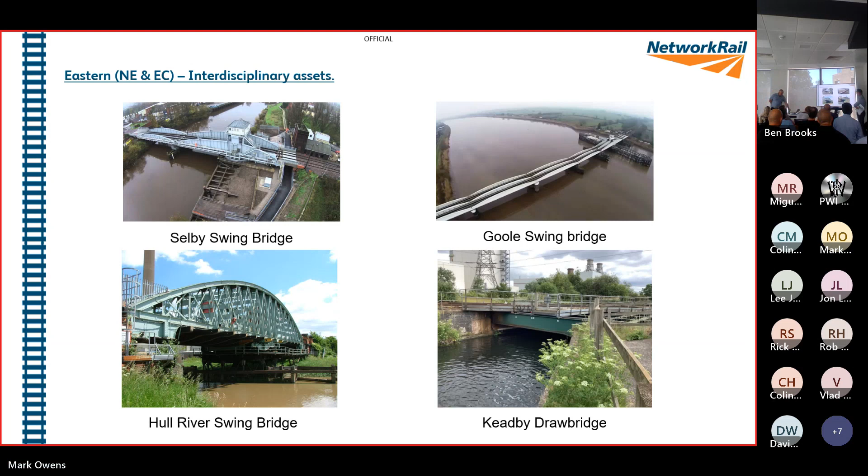Just a bit of background, and you can see the diagram there. When we look at Keadby Bridge, there are three bearing beams, and we've got some funny names for them: Gertrude, Madge, and Ethel. The one we're going to concentrate on tonight is Gertrude.

So just a bit of background. Keadby is located between Doncaster and Scunthorpe. Most people will have had some interaction with Keadby Bridge in their careers, and I've no doubt there's a lot of people here that will have had at least some issues they've had to solve on Keadby. It's obviously a complex asset, and a multidisciplinary one as well.

For me, it's more about this: if anything fails, the bridge doesn't work. So it doesn't really matter whose fault it is, it doesn't really matter what the fault is—it's about trying to get everything back working as quickly as possible.

It started life as a swing bridge, constructed in 1860, and was converted to a drawbridge in 1925. Since then it's had, I think, three replacements of the deck, the latest being in 2003, and the last real intervention was in 2007 when the west abutment was renewed.

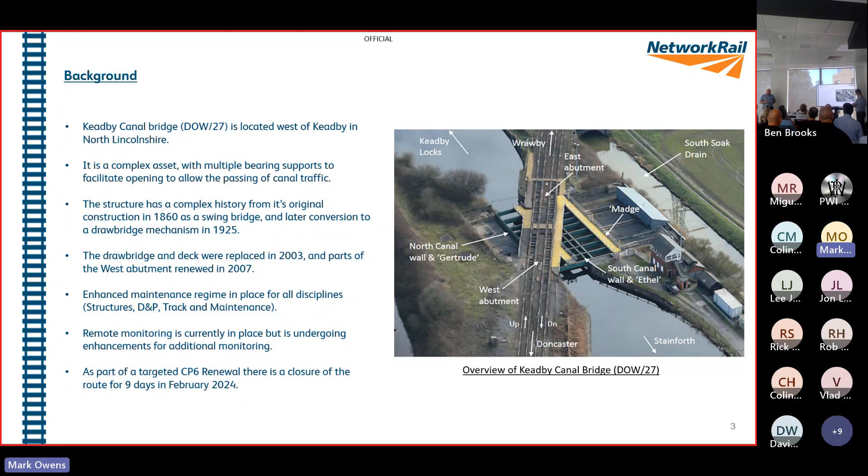So historically, lots of people in a room like this have been involved with Keadby professionally. I was not one of those people. So when I had the gift of Keadby come under my portfolio, I didn't really recognise how strategically important it was until it went into one of its periods of being temperamental. The route managing director was straight on to me saying, what's going on at Keadby? And I'm a bit like, it's Keadby, what's that?

It's a swing bridge, and it's a bit like it's all freight goes along there. You see from this map, Mark's already described geographically where it is, but it's really important for getting freight to and from Immingham docks, and more importantly, it serves Drax Power Station, so it's heavily linked with supplying electricity to that part of the region.

There's some really alarming stats about how much biomass Drax stores on site. When I looked at Drax back in the day, it was coal, and now it's biomass, which I think is better, but it burns faster. So it's something like they've got 3 days supply of biomass there, and once that's gone, people's lights start going out. The main arteries for that are through Keadby.

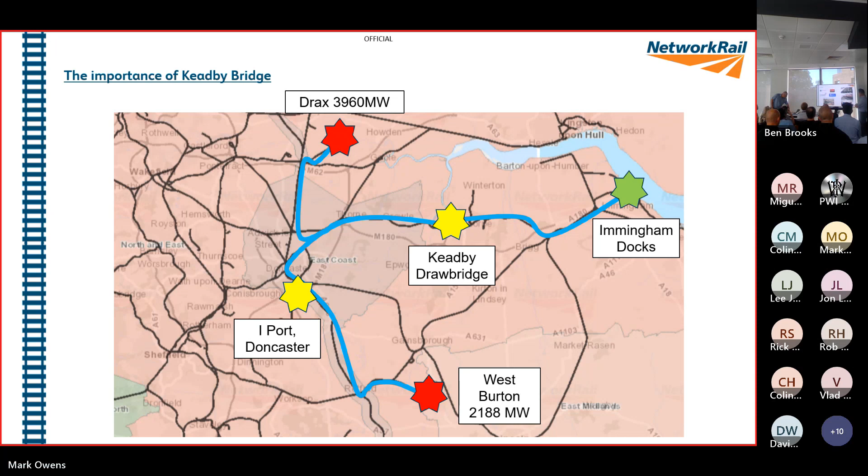These are the main customers, shall we say, the railway customers that use Keadby's. We've got passengers, Transpennine Express and Northern, and we've got freight. But the Canal and River Trust are really very important customers as well.

We've got a lot of pleasure craft that use the canal, and they do have a right to pass. So if we close that bridge for any period of time, we pay something in the order of £5,000 a day to the Rivers Trust.

So this is just really showing who interacts on that bridge. As I've said before, anything goes wrong, nothing works. So we've had to get really good at collaboration on this bridge. When I first came back in touch with this bridge as the IME, we were still a little bit of a standoff. I met with Simon, and we managed to start getting a lot of good collaboration with all the disciplines.

Now, the first thing I'd like to talk about is if you look at the construction of the bridge, when it was constructed as a swing bridge, you can see that the foundations were much better thought about. The construction with the piling, the arches, the pits itself is a really robust construction. You move over to the south side, which is the third pit, and it's not as robust. The piles aren't as deep. It looks a little bit like somebody's got a concrete block and just plonked it on top. That's the biggest difference you can get really on the construction.

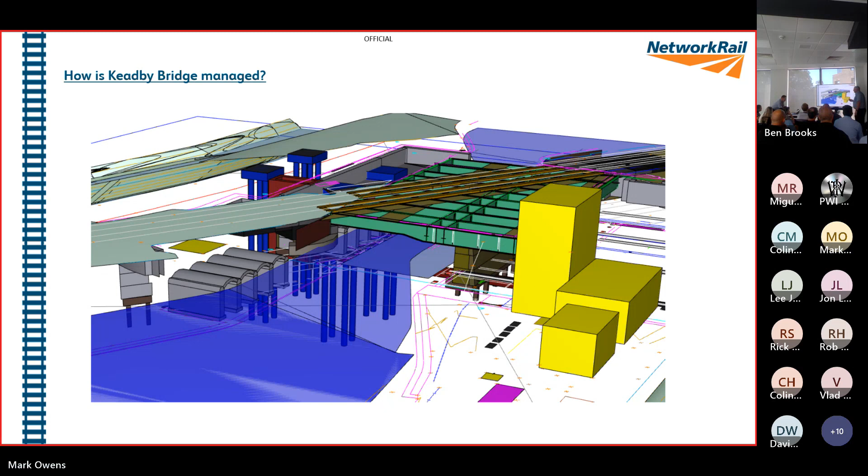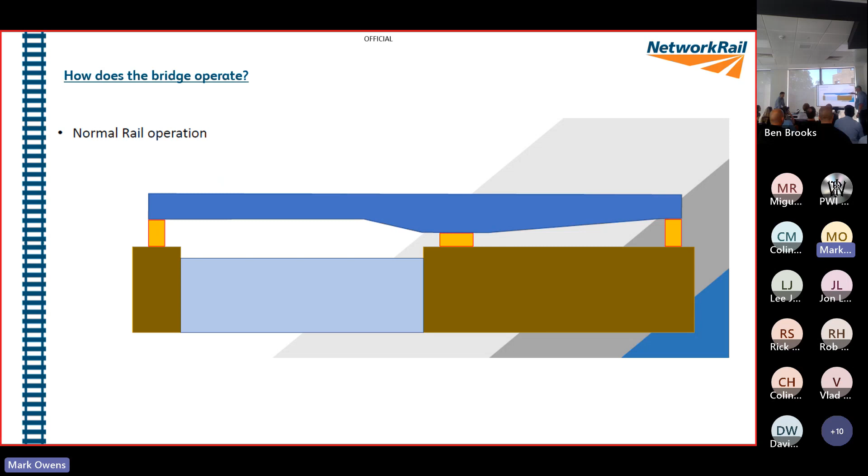Now, how does the bridge operate? This has got 3 bearing beams, and I can't remember the names of them in order, so I won't try. But that's it sat at rest.

First off, what happens is at the back of the bridge, there's a number of jacks, and those jacks lift the bridge up. It then pivots on the northern bearing beam.

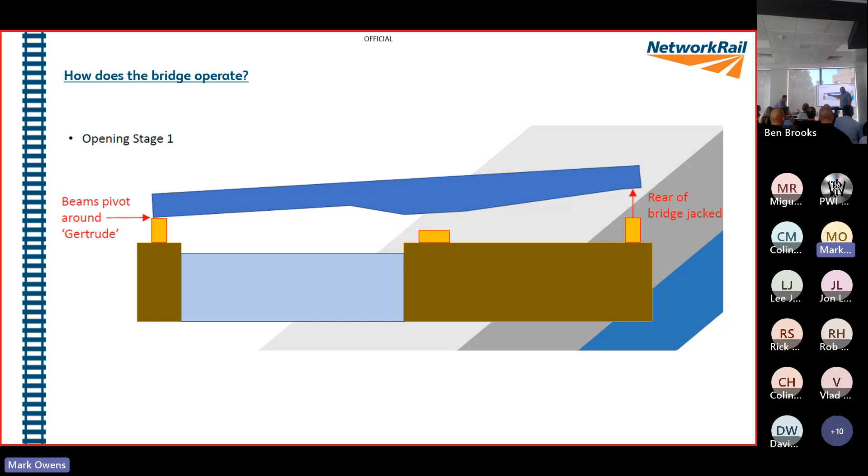These are the jacks. There are 6 jacks that lift the rear end of the bridge. This device, the rotary flow divider, makes sure that these all lift equally.

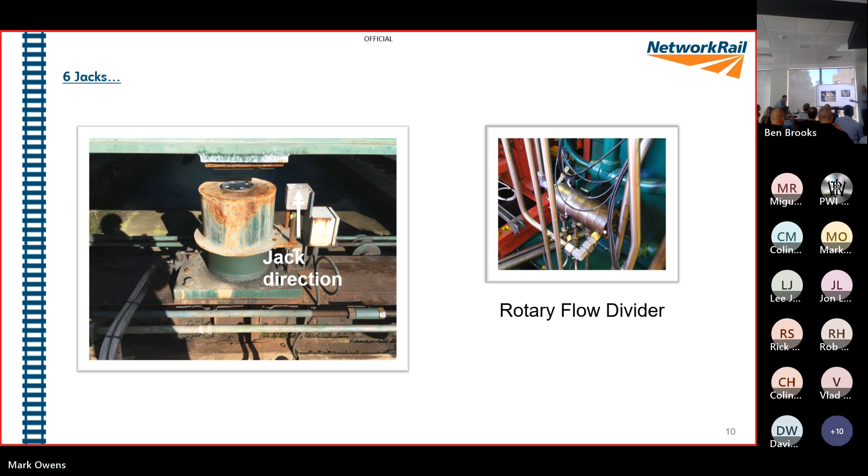So we then get to a point where the wedges are removed and the bridge is up in the air. At this point, I'd like to point out the bridge isn't actually flat like this, it overhangs. The bearing beam sits and there are overhanging bits of it. There have been numerous attempts to solve the issues we have around the vibration that goes through the bridge when the train travels over it.

One attempt was to put auxiliary bearings in. But eventually, all that happened was, because these auxiliary bearings would have been around here, the bridge pivots onto it and puts all its weight onto the auxiliary bearings. So literally all they did was punch through.

Now, the design that has been done by John Livesey stipulates that we don't need those auxiliary bearings. If the northern bearing beam is robust enough, we don't need the auxiliary bearings, so they'll be removed as part of this bridge work in February.

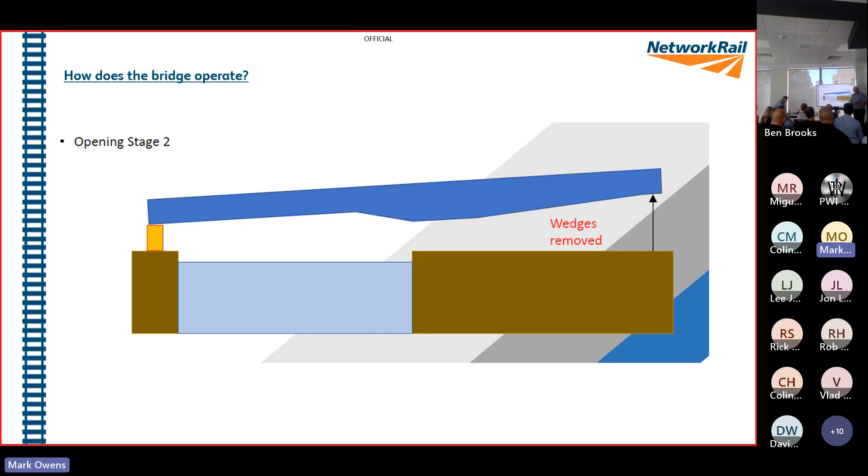And these are the wedges. You can see the rodding. When the bridge is jacked up, this rodding pulls the wedge out.

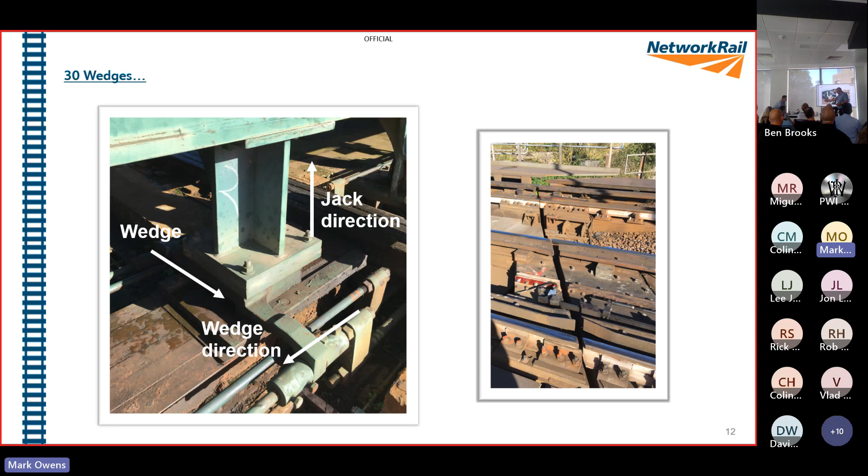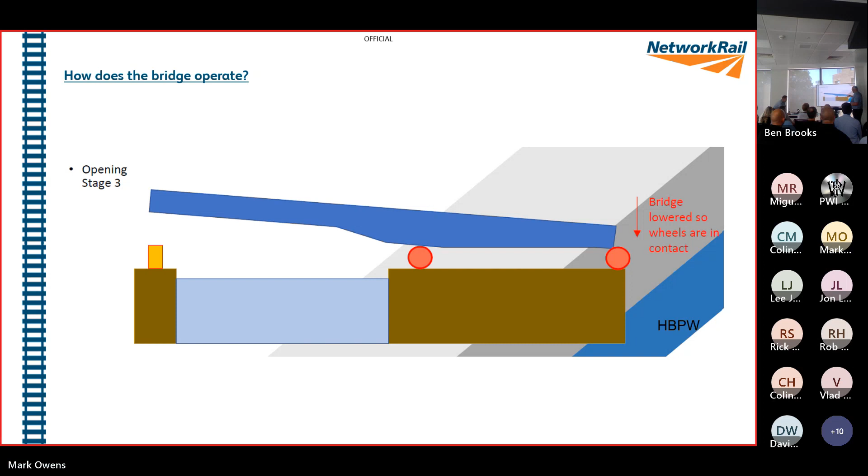Then the bridge lowers down, pivots off on the central bearing beam, and lowers onto the wheels. So those are the wheels, and basically once they're in contact with these runners, it then draws back.

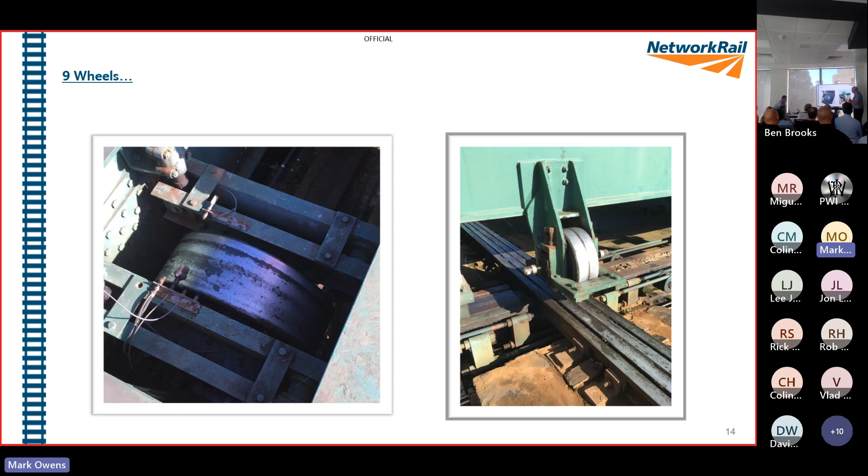Now this is literally just the stuff in the plant room. When you go in the plant room, it's a really impressive place. This has changed very little - the engineering thinking behind it has changed very little in all the years this has been a drawbridge. As you can see, there are 2 winches, there's the reservoir for the hydraulics, and there's also a backup winch motor.

Now, there's a piece on this rope that was hand pumped when they first put it in, and to get a full rotation of the winch took them about 36 minutes. People were tough about that - and it moved it about 2 foot. So obviously it needed improving.

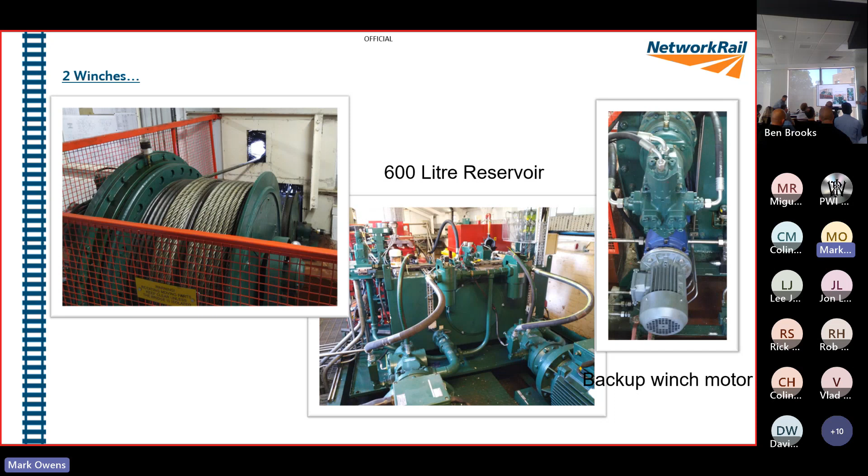So that's the draw pit. Having been there a few times myself, I can assure you that once you're under here, when a train goes over, it's very, very loud.

So basically what it was supposed to show was all of that working as I've just described. We'll put it on the website afterwards, you can watch it at your leisure, and there's a lot of noise in effect.

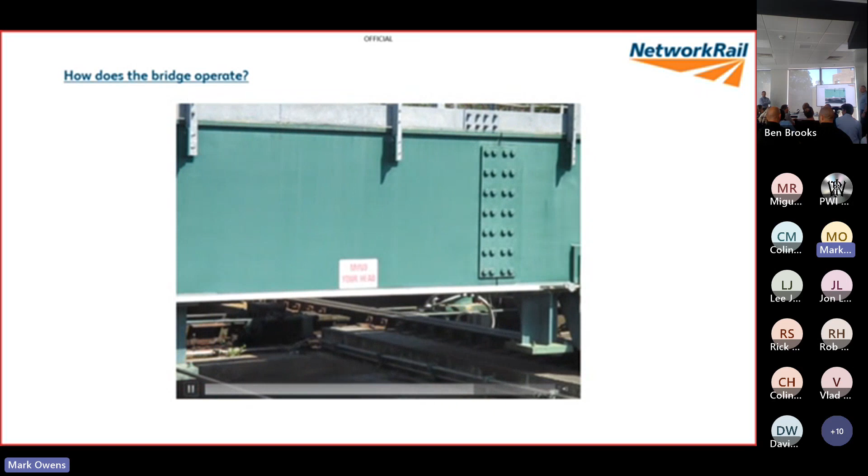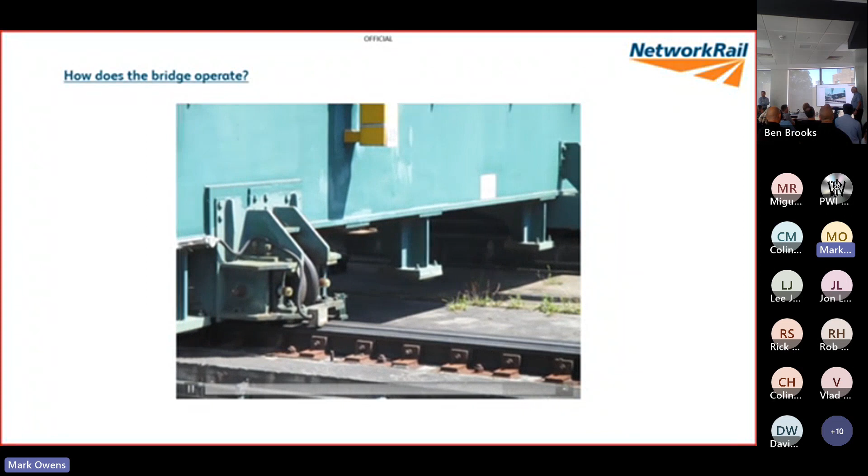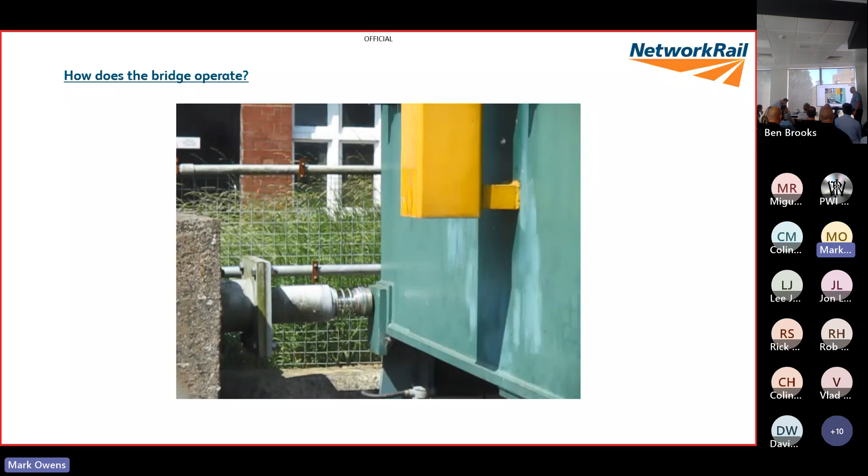Okay, right, okay, let's have another go. Excellent, we're past it. Right, oh dear, it's me again, isn't it? You again. Yes.

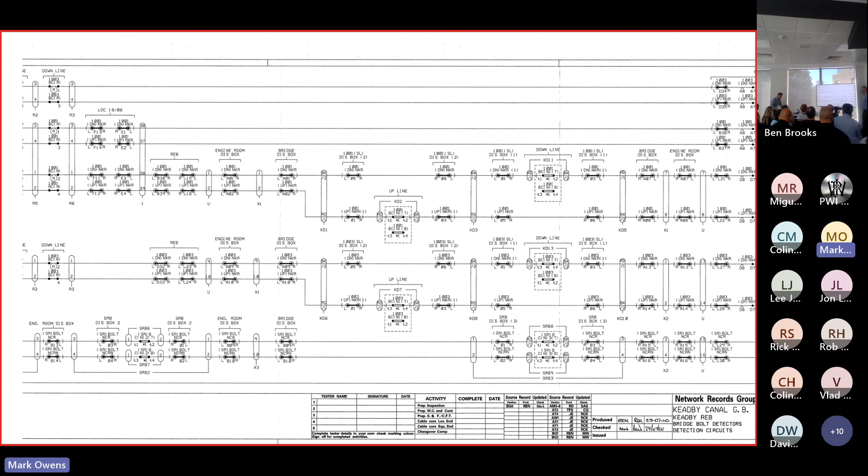And I should say as well that this is looked after by Scunthorpe S&T. I didn't know whether I expected any S&T from Scunthorpe in the room today, but they might be there remotely and get offended if I don't say that.

So again, the other thing that's happened over the years is the bridge utilises these rotary detectors as a means of detecting things across the bridge that goes one way and then reconnects. These electromechanical detectors are notoriously unreliable, so I've looked after these for a lot of the different swing bridges. They've been replaced with a solid state equivalent, which I'm kind of saying is a lot better.

And I'm looking at Dan, are these more reliable than new stuff? They are, but they're not solid state. What are they? They're cam operated micro switches. Okay, but they're still better in reliability terms. They are, yeah. Thank you, Dan. Yeah, that's all I need to know. But they're also using Goole Bridge as well, so they've got to be good.

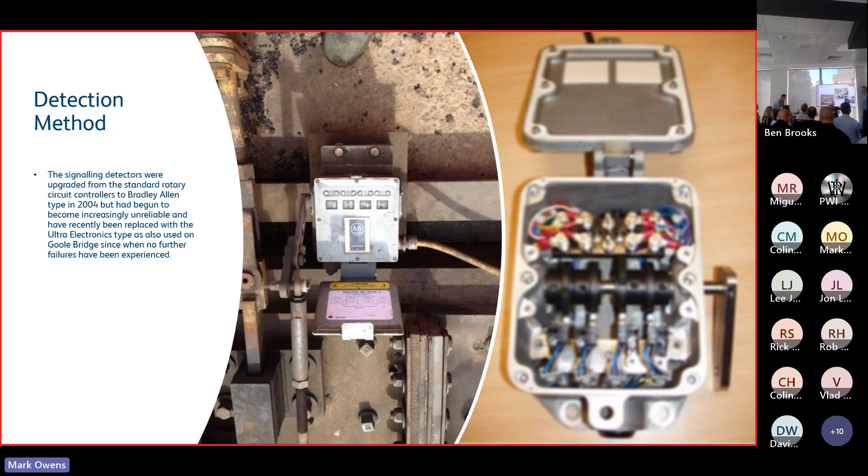Right, so we've got a control system, and this is a PLC. For people who don't know, apologies, it's a programmable logic controller, which is a kind of computer system that's programmed for one or two particular tasks. In this case, the computer system is programmed to operate the bridge and operate all of the motors that Mark showed us a few slides ago.

What this means is that we've got a little plant room at Keadby that is primed for monitoring. So if we just move on to the next one, there we go.

So Mark thanked a few people. We've got Chris Garton from MPEC in the room today, so I just thought it best and appropriate to thank MPEC because they've helped us monitor, I wouldn't say everything on the bridge, but we're probably about 80% there now, with all the moving parts, all the jacks, all the systems that have got pressure. So we've got digital and analog monitoring here, there and everywhere. We've got a handful of stuff still needs to be looked at to bring it into this platform.

Which I kind of compare to a digital twin. You think of digital twins these days and you think you're going to put your goggles on and go into the holosuite, all futuristic. So this is a digital twin effectively of a moving Victorian bridge. This system on the left is what you'll see if you go onto the computer site, and the one on the right is the actual panel in the engineers room at Keadby. So when the engineers or technicians go in, they can look at that actual panel front to find out what's going on.

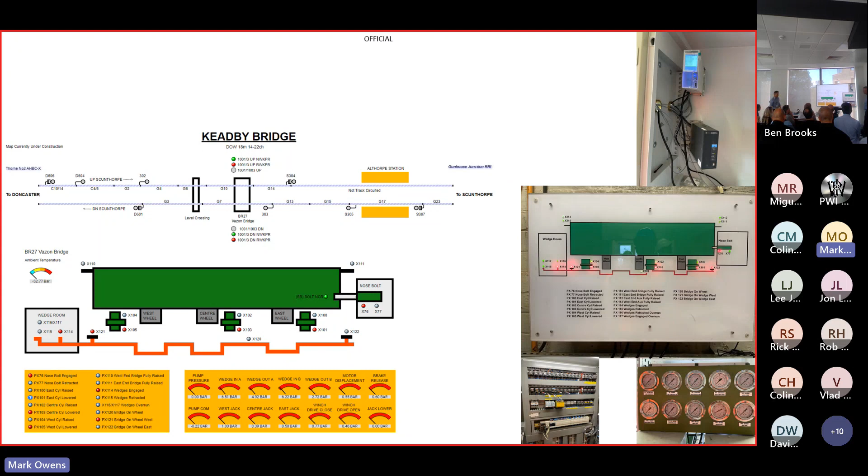As well as the diagnostics, this is the latest dashboard we've set up, intended to be dead easy for everyone to use. Green is good, the bridge is going to move and swing without a problem. Yellow means something isn't as it should be, but you don't have to put your cape on and go flying out to stop everything—there's a problem, but you might just click on these buttons and it takes you into the data sets. So if you're an engineer from signalling, track, plant, or structures, you'll click on one of them and it will go into your world and show you data you should be able to understand and think, actually, I need to do something, or I don't need to do something.

And if it's red, unfortunately we don't have any red ones yet—that would mean there's an imminent likelihood of a bridge failure. So what you really want is all green and a handful of ambers. And this bridge we've found is really susceptible to heat.

So it's been a hot day today. But last year it was closed for most of summer. I think it's an instruction that if the temperature gets above 26 degrees, we shut the bridge. The idea behind this is that's kind of draconian, really. There's no science behind that.

Closed to canal traffic, I assume. Yes, closed to canal. It's £5,000 a day, and I don't know what the overall cost was to us last year. It were about £250,000, that we paid to Canal and River Trust last year.

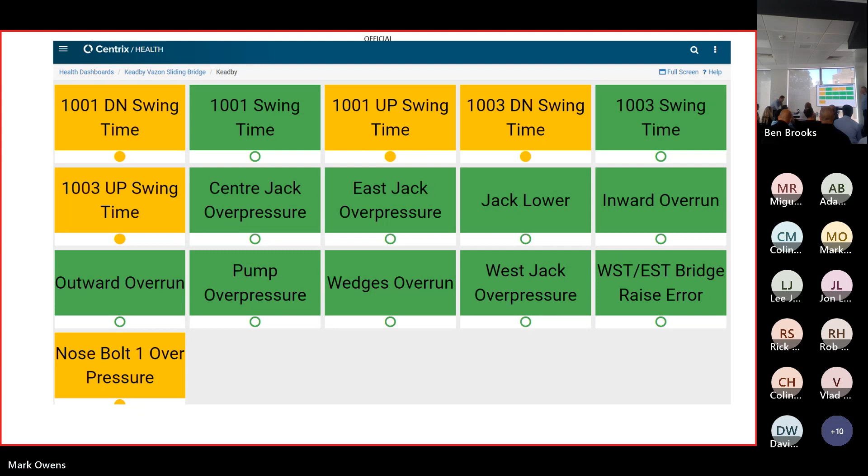So we've come an awful long way, and the reason for putting these traces up, this is what you get if you click on one of those yellow boxes. It's really interesting because this particular one was a snap lock. You don't need to start looking in detail at the trace because it's not particularly clear on there, but it was a loose snap lock that we were able to send a team to go and have a look at.

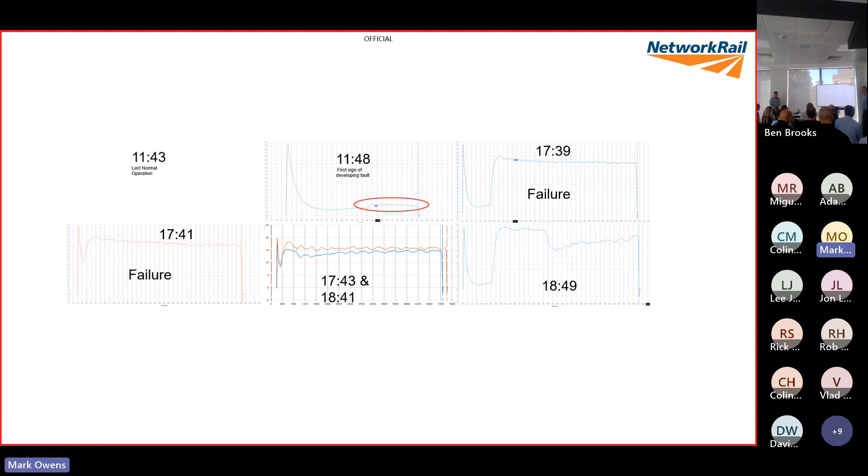Which might feel a bit trivial, but it was one of the first big wins that we had, and we thought, yes, we've got something that has given us a heads up. We sent the team there, and we've not caused any disruption. So it was a real pivotal moment in our journey.

And here's the one with the pressure one. That's the nose bolt for how we locate the bridge and ensure that it's located correctly. And there's a pressure trace for that.

So there's some really interesting things happening, and we're going to use it throughout the summer, throughout the heat, to keep us in a really good level of performance. But it's only as good as Mark encouraging the teams to react when we get an alarm. You can have all the monitoring you want on any asset, but if people ignore what it's telling you and don't go to site, have a look at it, and even if there's nothing wrong, feed it back into the system such that it can learn, then all that money's wasted, isn't it?

Okay, so just knock back a little bit. Take the last one, William. So as you can see, the nose bolt is a hydraulic ram in effect that goes through a hole. I want to point out, because on the further picture later on, it's a little bit different, but that is very, very central.

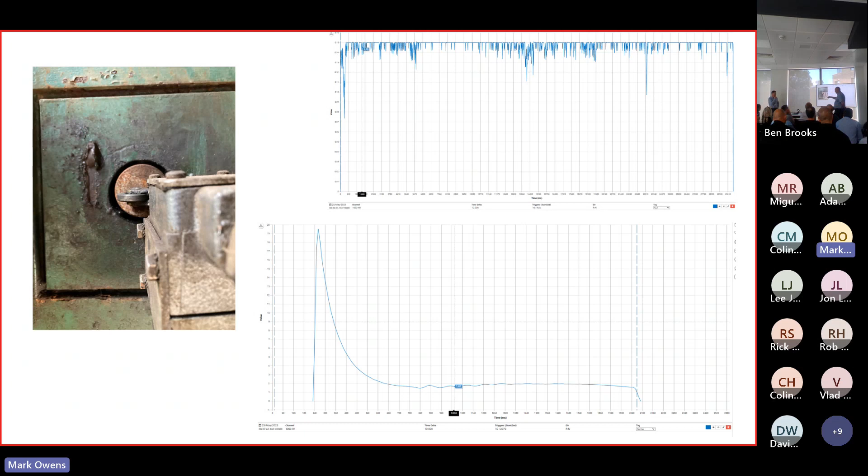Okay, so failure modes. These are crack failure modes, really. When you look at the bridge itself, most of the failure modes we've got are caused by vibration. The run on to the bridge, generally at the up west side, I have to do that little jig in here every time. When it runs onto the bridge, it induces a load that seems to vibrate through the bridge, and it causes failures at the opposite corner, so diagonally.

As you can see, we've had loose and defective snap locks, we've had insulator faults, we've had the bridge unable to close, and that's where Ian was saying that we believe that's heat related. And when you looked at the monitoring, that's the latest thing to have been monitored. Because what we're hoping there is, because it's slightly chamfered, that it will start to bind before it fails. So the pressure will go up, we'll get an alarm, and we'll just stop using the bridge.

And again, more insulator faults. Now the north wall has deteriorated significantly, so the bearing beam is deflecting, or it was until very recently. We're getting around 10 millimeters of deflection. So on the up road, it drops onto the bridge.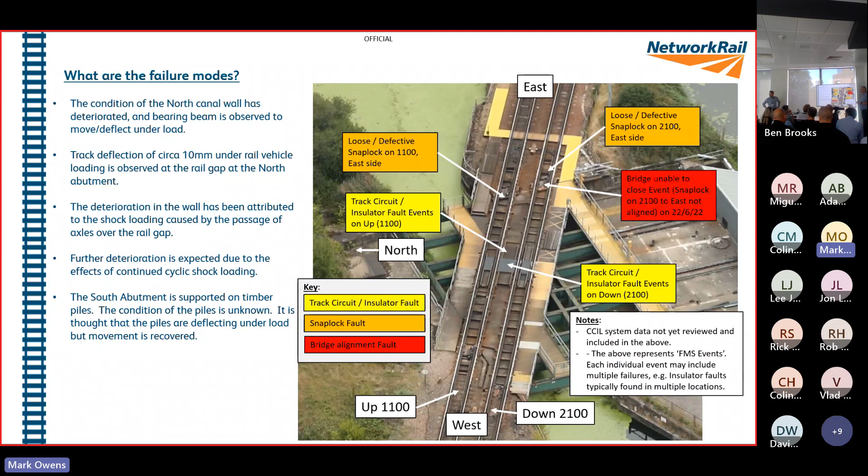If you imagine, just on about the 10 mil drop, you hit a wall with a hammer once, and we're fine. Hit it 10 times, you get a small dent. Hit it 1,000 times, over time, you're going to get continued deterioration, and that's what we're seeing. That's one of the problems.

Now the bridge is designed to try and hold the rail ends solid and let the rail breathe into the bridge. There's a set of breathers in the middle of the bridge, and a set of breathers on the land side. The whole design is to try and hold the rail ends in place and let all the rest of the rail move. That hasn't been successful at all.

We've had issues with it breaking screws, breaking bolts, breaking base plates, you know, so that's just the force that's going through the rail.

As you can see here, you probably can't actually because it's very dark, but this used to be a solid plinth on the brickwork, and that brickwork is all dropping out. It's all loose, but you can see the individual bricks where you circle.

Just about. It's worth mentioning as well, it's on a skew, so that adds a factor of complexity for Mark to maintain the line. Because the joints are not square, so everything draws a strange angle for the track.

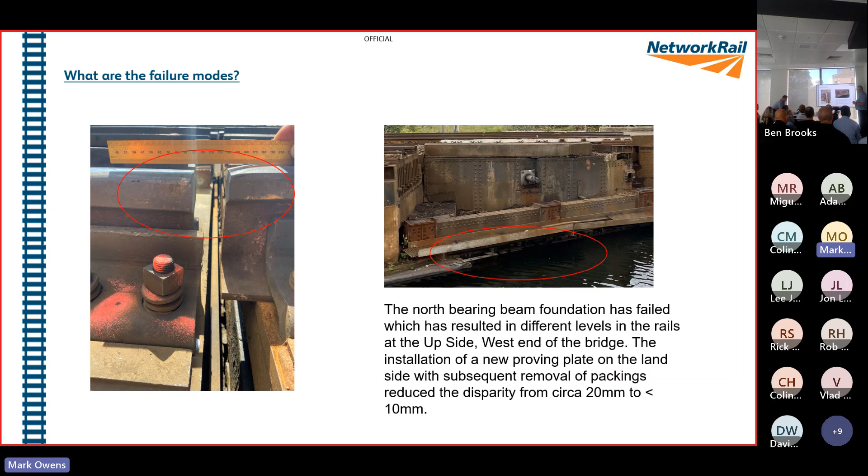Next one. Yeah, I've lost my train of thought. Right, let's move on then.

Now on this one, as we spoke about with the nose bolt, and the reason I asked you to look at the previous nose bolt photo is because that one was very central. As you can see on this one, it's very offset.

Now the bridge, when it swings, never goes back into exactly the same place. So we can reset this plate, but they can't set it in the right place for every single swing.

So the faults that we've had is obviously the nose bolt snags in the aperture, or it will not drive home, and therefore will leave the bridge.

We've had the bracket, and I don't know if you can see from there, but this has been welded on, and that's been welded on probably 3 or 4 times. And that again is just from the vibration that goes through the bridge. The bracket is snapped off.

We've also had the snaplock itself drop off the bracket a couple of times, again due to the vibration.

Now when you look at this one, you can see the new proving plate. But where the problems we have with the installations, and I'm going to send a few of these round. Those are ones that have obviously come out.

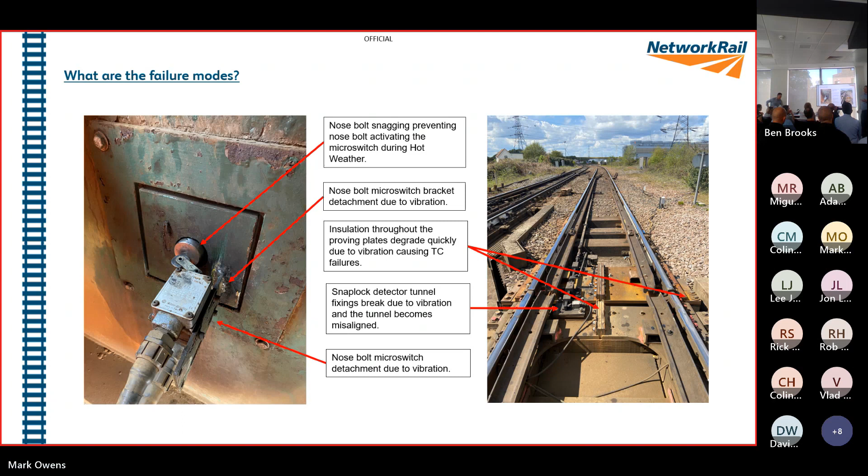So what have we done? In effect, the actions that we've had over the past year or so.

We've got E&P, they're actually going 2-weekly to look at the asset. We've got 4 weekly visits from track, signalling and structures, and we don't all go together, obviously. That's track 1 week, structures another week, S&T another week.

We've got the multidisciplinary action group. That was established, I'd say about 9 or 10 months ago, and it's proven to be really, really useful. It's brought everyone together. The collaboration's been really, really good.

And because we've brought some people like Ian into it as well, we've managed to bring the likes of MPEC in and start to really get some traction around the remote condition monitoring.

On the tactical, when I was talking about remote condition monitoring, all this now is about gathering data. We're not baselined yet, but we're gathering the data. We're responding to a lot of the alarms that MPEC are feeding through to us.

And I think most of the time on Centrix now, don't you? But so we're getting some really useful information. And as Ian said, the actual counters, I had a chance to adjust this because I didn't know they went live yesterday. So, strategically, we're talking about renewal. This is every intervention now, strategic intervention, has got to be substantial.

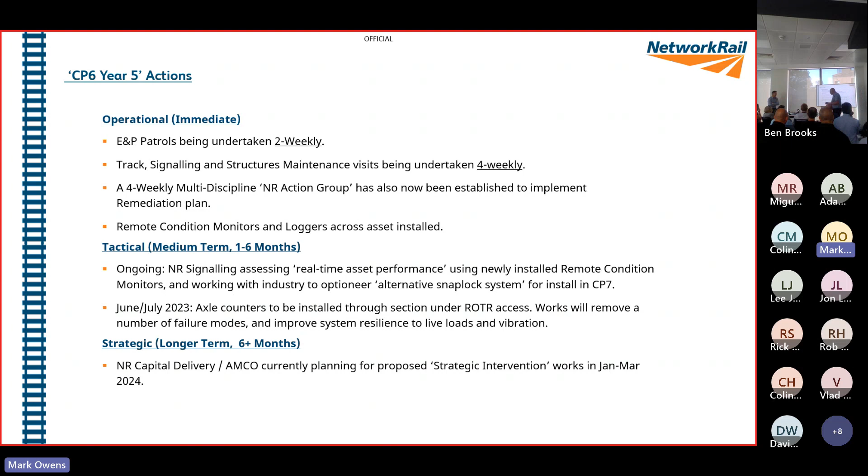The other thing to talk about is that the axle counters don't just give us a detection system to remove a failure mode. That's a new installation of the old type, and that's a new installation of a new type, not for the same place. I couldn't tell you what type of material it is - I'm not even sure I could pronounce it when I read it. But it's a material used on roller coaster wheels, highly resistant to impact and wear. The axle counters will solve the problems, and we've got lots of these, so if anybody needs any installations, we've got some.

Once the axle counters are installed and working, and we've removed the other type of train detection, Simon will descend on the bridge with his people and just weld everything. A lot of the problems we have around the snap locks will all just get welded. We'll have new problems with axle counters to work out, but all the loose bolts and issues around the installations will all just go away eventually.

The solution for the north bearing beam - and I'm concentrating on the north bearing beam because that's the primary issue we've got now - it's proposed to reinstate the bearing beam with a new bearing beam and a new bearing plinth. They'll take it down. It says there it's good brick, but I'm not sure there's much brick in it anymore - it's mostly ground now, I think. So they'll cut it off, install the plinth, and that should dissipate the forces through the bearing wall much better.

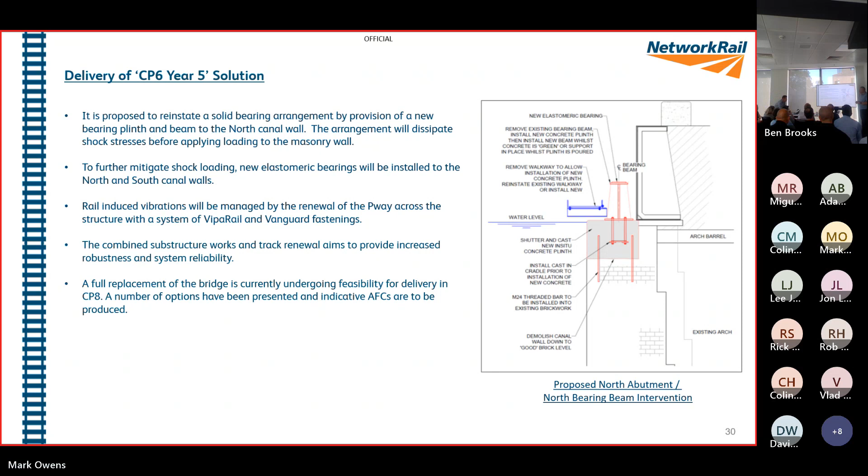Moving on. Okay, so I think we can call Keadby the gift that keeps on giving.

When we talked about the grout, this is the northern abutment. Every one of these dark areas is a void where the brickwork has disappeared, and some of them were a metre and a half deep. So as you can see, it's not in a good state, it's deteriorating, and we had to step in and do some building work to keep it going till February.

As Simon said, there was a significant amount of grout pumped into that. There was a lot of disruption for his customers, and we had to work very closely with the Canal and River Trust.

On the left, there's a construction there, and those were installed about a year ago. That was because this bearing beam had gone out of alignment.

Once it had gone out of alignment, all of these started to snag each other, and the bridge would fail very regularly. So structures went in, did some remedial work to put the alignment back in, and it's quite difficult to see, but it started moving again, around this area it's moved, pivots.